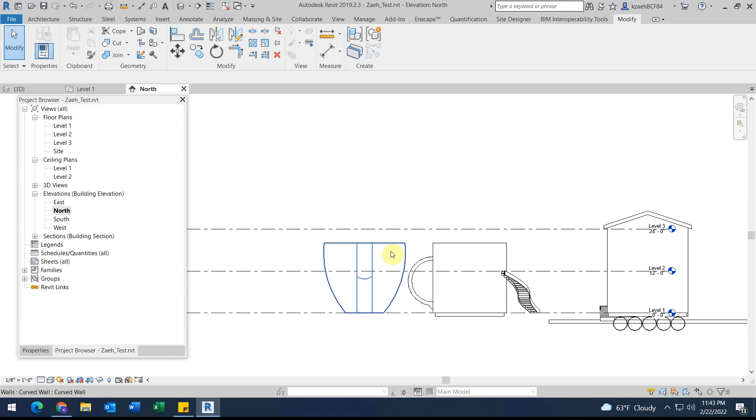A series of domes on a roof that looks kind of like an ice cream cone. So the less things are just straight up and down in Revit, the more complicated things get. But I think also it's just kind of a complicated geometry to think about in the first place because

spheres don't meet easily. So if I took a look at some other buildings, how do these domes meet flat walls, right? It could be something like this that you might see in Greek architecture where, let's see if we can get a little bit closer here. Oh no, it's not going to make the picture bigger. But you can kind of see that there's an octagon, right? So there's an octagon and there's a dome over it, and there's flat roof at the edges of the dome.

Another way it might work, in this case this is St. Mark's Cathedral in Venice. So here there's a series again of flat roofs, and then the circle of the dome roof meets that flat roof, and there can be a series of them. It might also be that there's just always a tower coming up that is circular that will meet the dome.

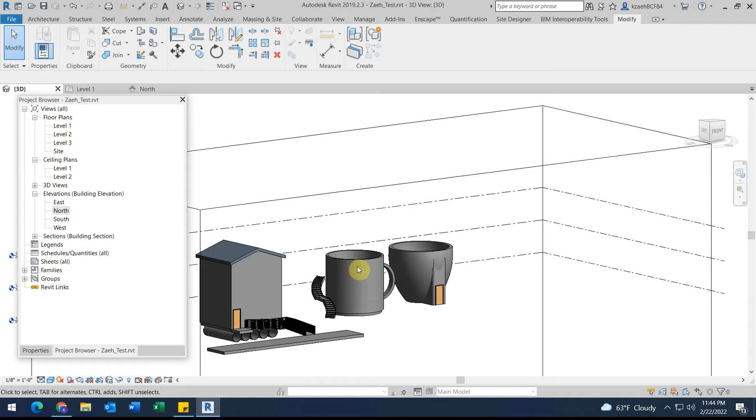So for ours, let's try to at least get an idea of and plan what we want this to look like. So if I go to my level 3 plan, I'm looking at this one. We're saying that we want there to be four kind of scoops on this level and then one more scoop on the top. So I'm going to go to Annotate, Detail Lines, and here I'm just drawing in 2D what I think I want. So let's say I'm going to have 4 of these.

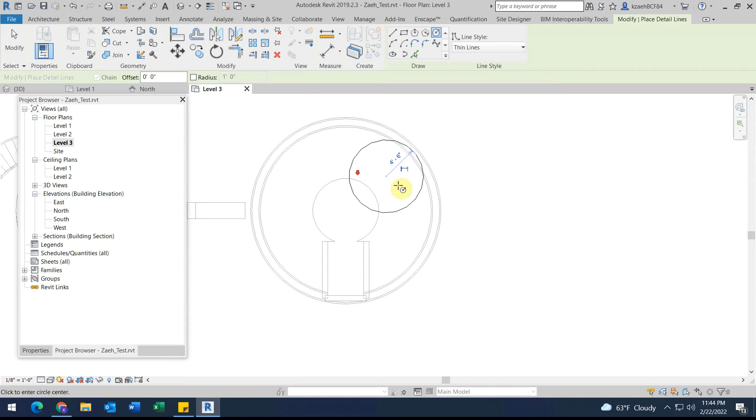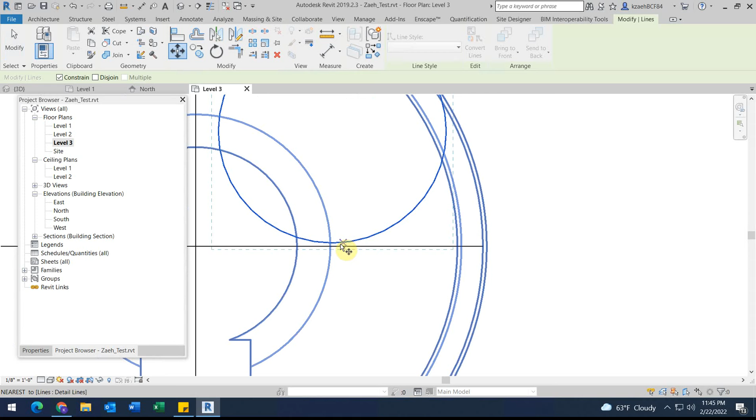So I want a midpoint. I'm going to start out using this just to figure out where is the middle of this. I often draw guidelines to help me out. So let's say that I want 4 of these circles, and I want it to kind of be touching these 2 lines. Okay, so I'm going to have one dome here, and then I think I'm going to mirror it over all the sides. Well, but I still have that center dome I need to make room for.

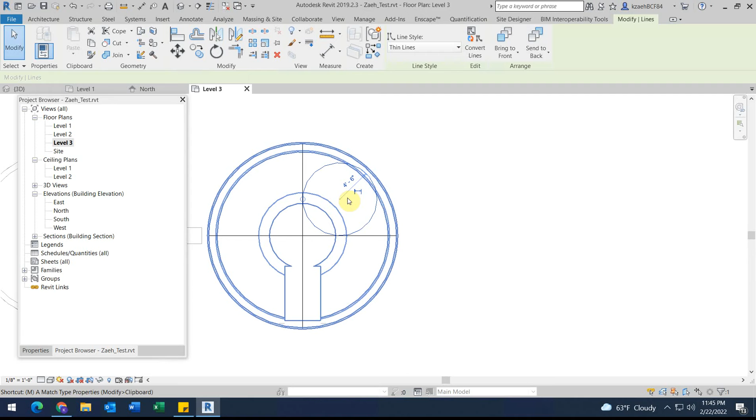So maybe I really need to think about that center dome first. So I want the center dome to be right here. And maybe that one's a little bit larger, and then the ones on the side will need to be smaller. So if I now copy this over, this is going to have to be a little bit smaller here. So I'm going to bring this down to, oh, too small. And I can also drag this edge out.

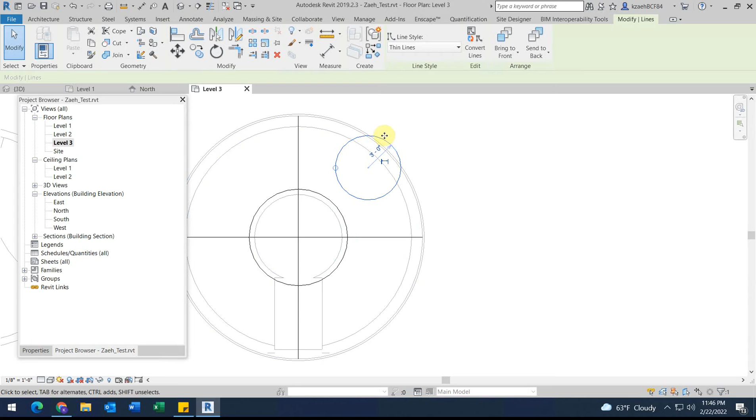So I'm not sure this is exactly what, it might depend on what your floor plan looks like, what exactly these domes will look like, but I'm going to use this as the footprint of the dome that'll be copying around. So I'm just going to mirror it over. So under Modify Lines, Mirror, I'm mirroring that line.

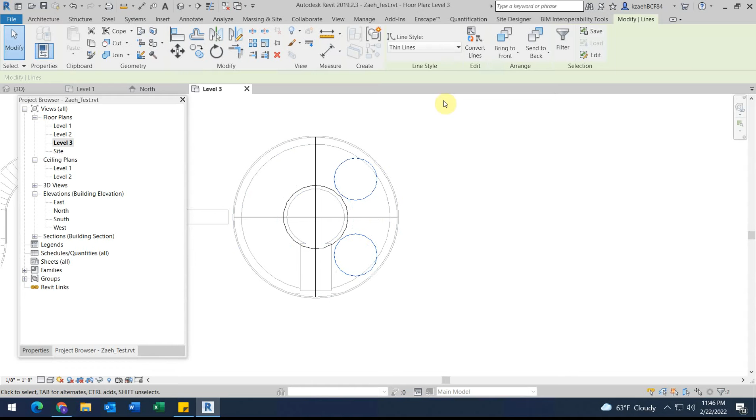Then I can select both of these by holding down Shift. Or sorry, maybe it's Control. By holding down Control, I can select both of them, and then I can use this tool to mirror it over the middle as well. Okay, so I'm going to have a center dome, and then I'm going to have these side domes. So that's helpful to start with.

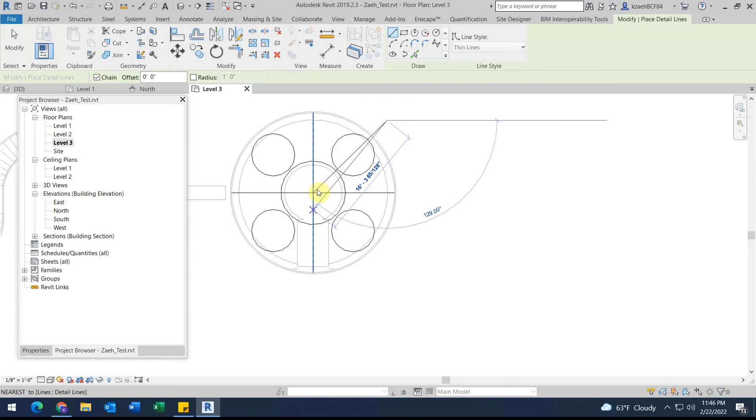I'm going to create a couple more lines for myself. So I'm going to make some diagonals here coming out at 45 degrees. And that's going to help me get those other domes where they need to be. Right now I'm not being very precise with where those are. So if I can find the quadrant of this, the center of that, I could make that a little bit more precise.

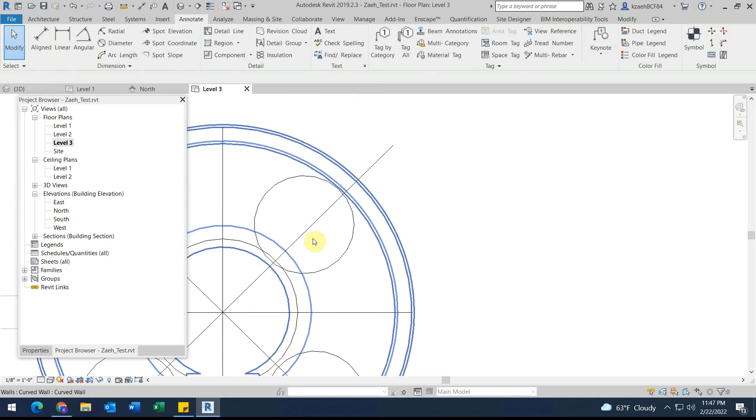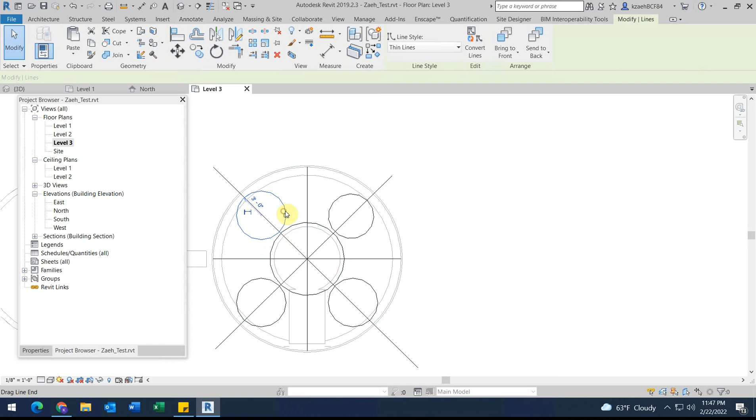So I'm going to rotate this 45 degrees. And then I'm going to kind of get that. I'm going to bring this point, try to get that point on that line so I know it looks about right. Okay, and this wants to be a little bit bigger. I know it seems like a lot of fussing, but it's good to have an idea of where you're going before you start. Okay.

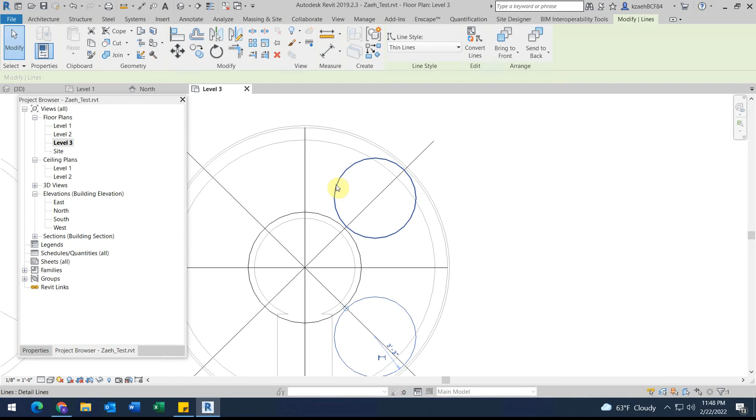Go ahead and mirror these again. Mirror those again. Okay, so here are my 5 domes, one big one in the middle. So the basic idea for making a dome is that we need to have a plane where I can draw the section of that dome in order to revolve it around. So we're going to do the middle one first because that's the easiest one.

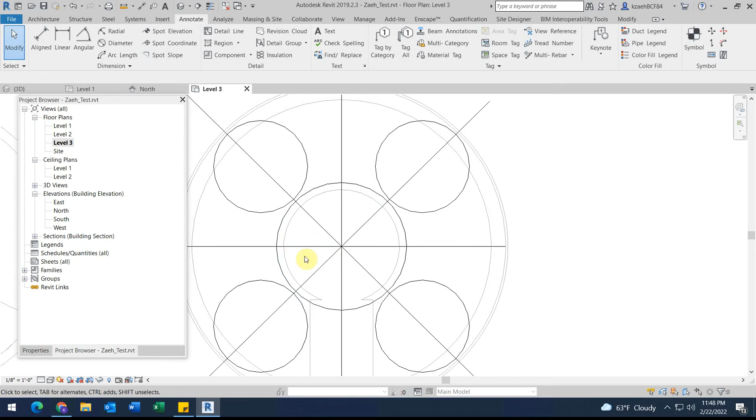Why it's easy is that we already have a view going this way. So if you zoom out, you should see this little triangle here. That is my elevation. So I can bring that in a little bit.

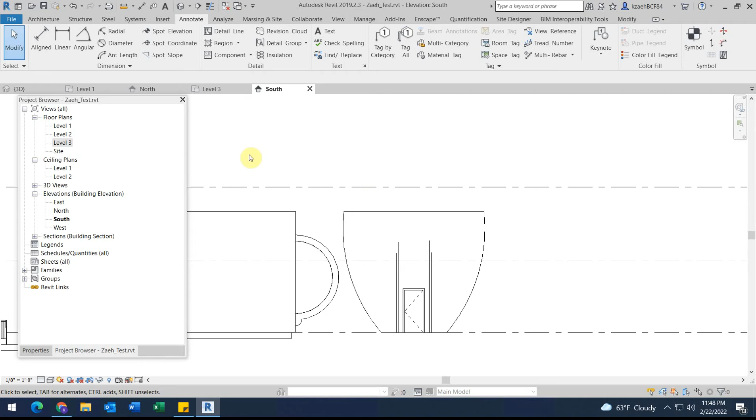But if I double click on here, it's going to bring me to an elevation of my view, which is fabulous. So right now I'm going to want this south elevation, my level 3 plan, and my 3D open all at once. To do that, I'm going to type in WT for window tile, and that'll allow me to kind of see a few things at once.

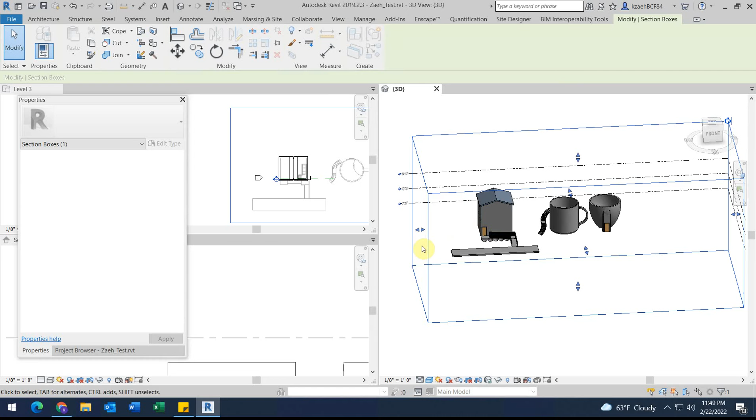I want to omit some of this other stuff from my view, so I'm going to take my section box. If your section box doesn't show up in 3D, go over to Properties for your 3D view, and over here under Extents, click on Section Box, and you should get these little lines here, and then you can drag in the sides so you don't have to look at everything at once, which I find helpful sometimes. Okay. So that's a little bit easier to look at. Great. Okay.

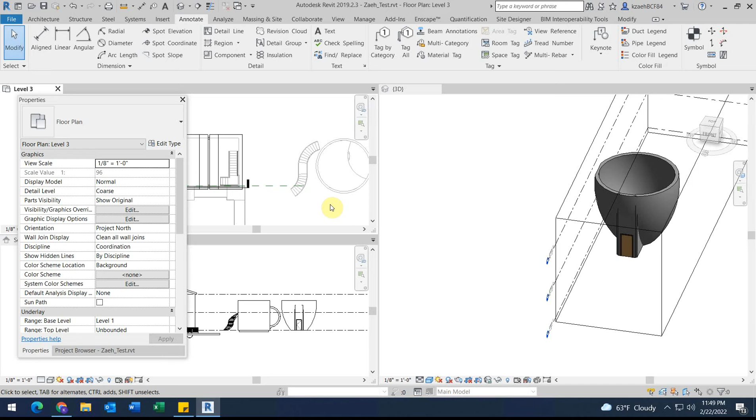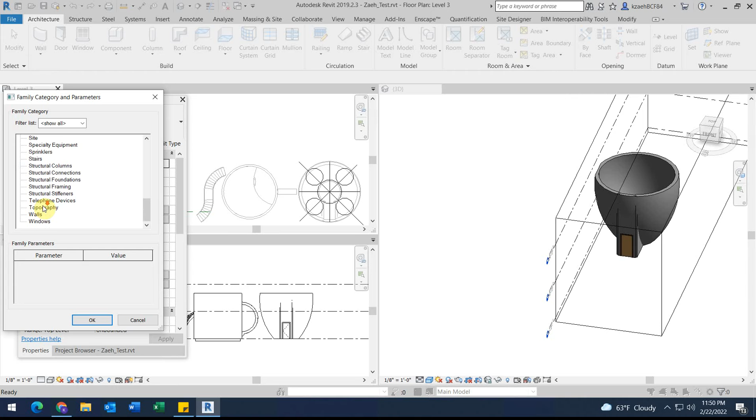So I'm going to go ahead and make my dome. So I need to figure out what the radius is that I'm working with, and also what the height is that I want for these. So to start out with, I'm actually going to make extrusions just so I can kind of see where these things are in my elevation as well. So I'm going to go to Architecture, Component, Model in Place. Here I'm going to pick Roofs and hit OK.

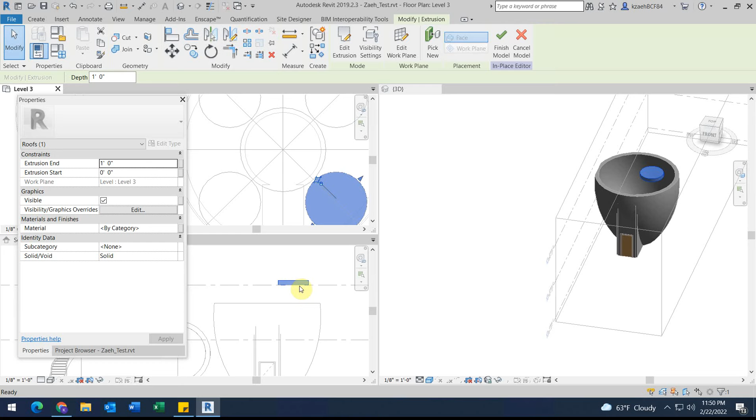So now I'm going to come over here to Extrusion, and this again, I'm just making an extrusion to begin with so that I can see where this is located. So I'm going to hit my check mark. Okay, and here I can drag these down. So let's say I want my dome to be about that high. Okay, I need to have a profile. Oh, sorry, I was going to do the center one first. My bad. All right, so let's do that one more time.

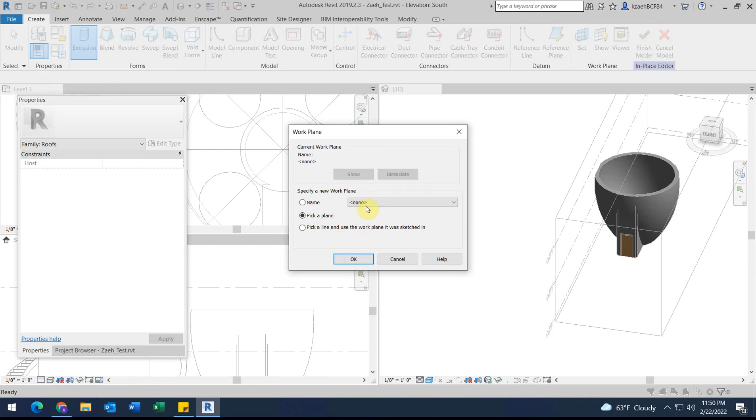So go to Create, Extrusion. Make sure you're in your level 3 view when you do this. Extrusion, use the green picker line to pick the outside of that. Hit the green check, then you can come into your south view and you can drag this down. Okay, so let's say this top one is going to be maybe here.

Okay, so I'm going to go now to Create, and I'm going to do a Revolve. It's going to ask me to specify a work plane. And here I needed to make a plane. So I'm going to hit Cancel. I'm going to come back into my top view. I'm going to make a reference plane, and I'm going to use that center line of my building. I'm going to name my plane Centerline 1. Okay, and then I'm going to go back to Create, Revolve.

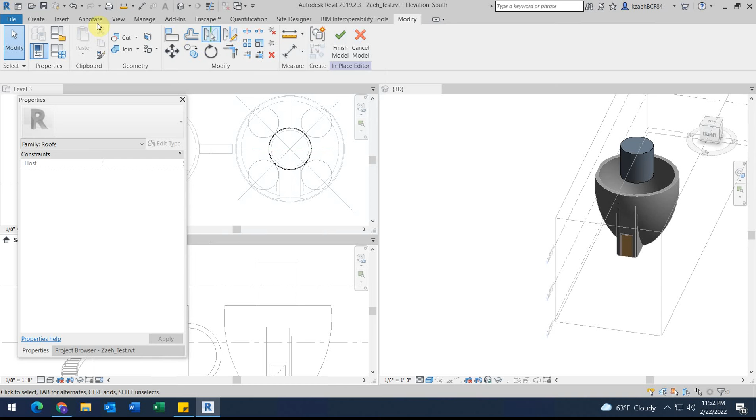Apologies, make sure you're in this view when you do that rather than your top view, because otherwise it'll assume you want this to be the view you're drawing on. So I'm going to come back over to here, then I'm going to go to Create, Revolve. I'm going to pick a plane, so under Name, I'm going to go to my Centerline 1 and hit OK. And now I'm drawing what one section of this roof is going to look like.

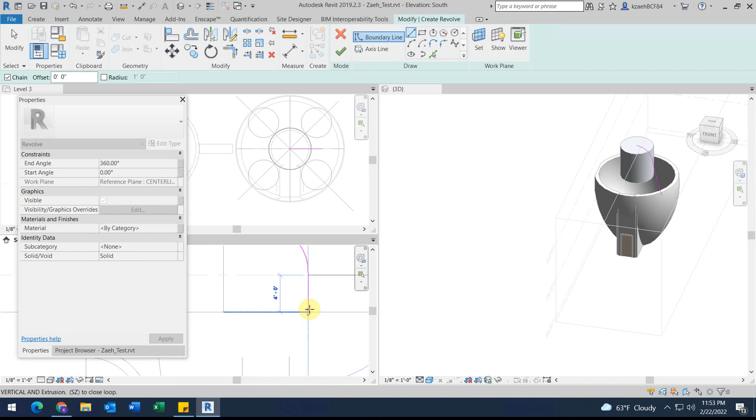So I know that I want it to have a curve, so I'm going to come over here to my curve. It's going to come from here, maybe that much of it. Maybe down to here is kind of the domed portion of it. And then I think I want it to be straight when it hits to here. And I could also do that as a separate wall.

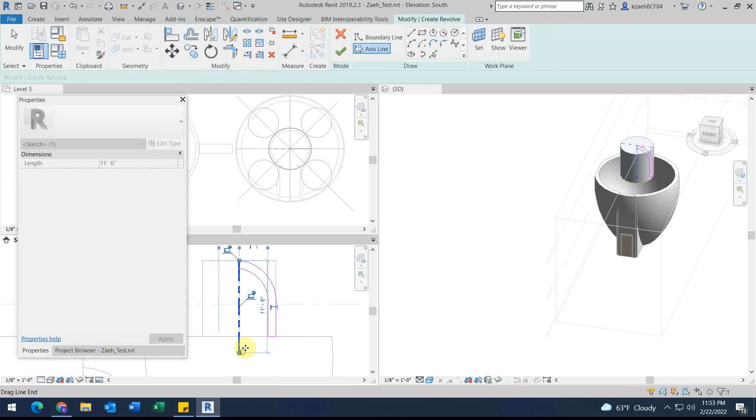And then I'm going to offset this 1 foot to represent the thickness of the roof. And then here I'm going to come straight down, straight across. I need this to be a closed line. Once I feel pretty good about this, I'm going to go to my axis line. My axis line is what it's revolving around. So I'm going to put that in straight through the center, and then I'm going to hit the check mark. So I need to delete the original reference extrusion I made, and there is my initial dome.

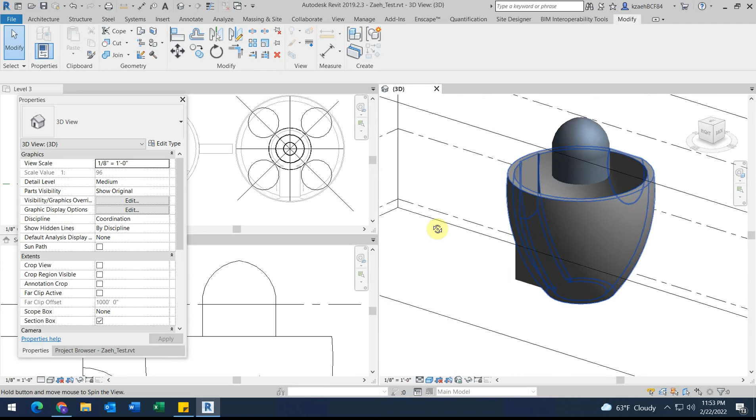Okay, so I'm going to finish my model here. I'm going to do these all as separate pieces. Okay, so here I have my first roof dome. I'm going to do this one next, and then I'm going to mirror it around. So very similar process for this. And hopefully it'll go a little bit faster because we've already done it once. So I'm going to go to Architecture, Component, Model in Place, go down to Roof, hit OK.

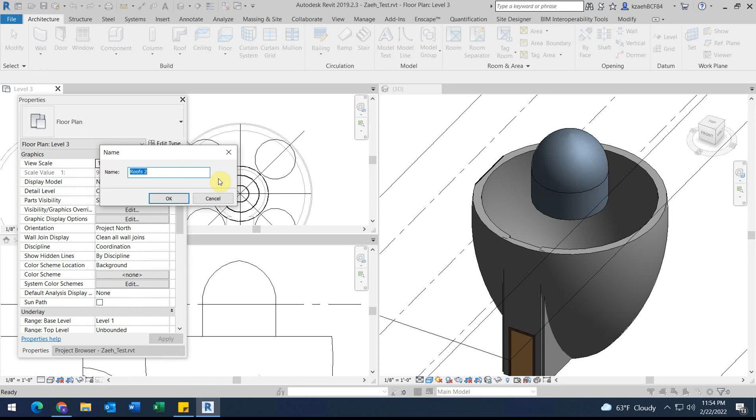And here the first thing I want to do is make my reference plane. So I'm going to click Reference Plane. I'm going to use this line I already made, click from there to there, give it a name, and I'm going to call this 45 ref. Click outside, then go to Create, Revolve.

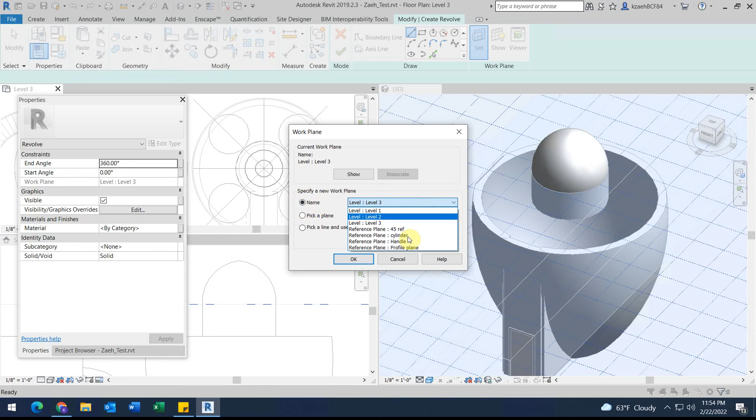And here's where I made a mistake again, right? I didn't have this selected, but I can set my plane later. So I'm going to set Work Plane, and I'm going to go to 45 ref and hit OK. It's going to tell me it needs to open a new view. So I'm going to go to Elevation South, and that'll be over here. So now I'm creating that second view.

What's a little bit tricky is I don't have a section looking right at this so that I can draw that accurately. And I didn't create my extrusion to begin with to kind of guide me, so I'm going to be guessing a little bit here. So I'm going to use my curve tool, come from here, that's where I think the center is, and about how I think I want this. I want it to level out a little bit when it reaches the roof so that I know it'll hit like a straight point.

So maybe from here to here it gets straight, and then I'm going to use my trim tool to trim from here to here. Okay, I need to offset this, and I'm going to keep my roof thickness the same, 1 foot. Then I use my line tool to finish off these areas. Okay, so here's kind of my second dome. I still need to do my axis line, which is going to be right in the middle here. I'm going to hit the check mark.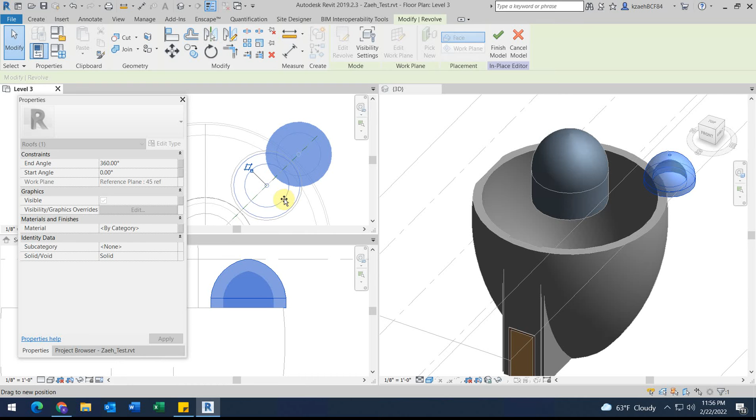Okay, so it's closed. It's just a little bit in the wrong spot. So I should be able to move it over to where I want it here, as long as I'm staying on that line. It looks like it's a little bit smaller than I initially drew. I'm actually happy with that. I could always make it a little bigger though. So if I come back over here, I can go to Edit Revolve, and then I can take this and scale it up a little bit. So let's say I wanted this to come out a little bit.

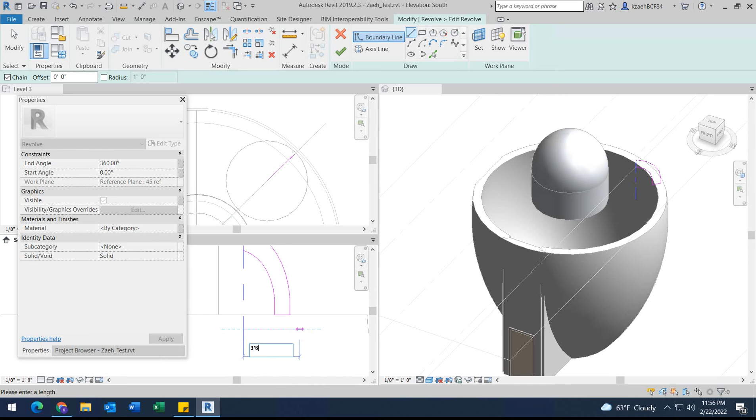For example, maybe I want the base to come out. Right now it's like 3 foot from there to there. Let's say I want it to be 3'6". So I could type in 3'6", just to give myself a guidepost. I'm going to delete these lines. Then I'm going to use this tool again, come from here over to my midpoint. Use my curve again. Trim this to here. I don't need it to go below that roof line, so I'm going to make this shorter. Then I'm going to offset it 1 foot.

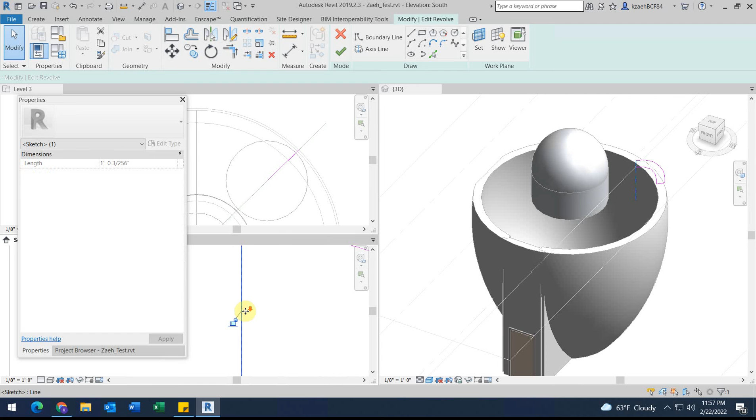And I'm going to close that up. Make sure that this line is actually on your axis line, otherwise it'll have a hole in it. And hit my check mark. Okay, so that came out, the size is a little bit better there. So I'm going to finish my model.

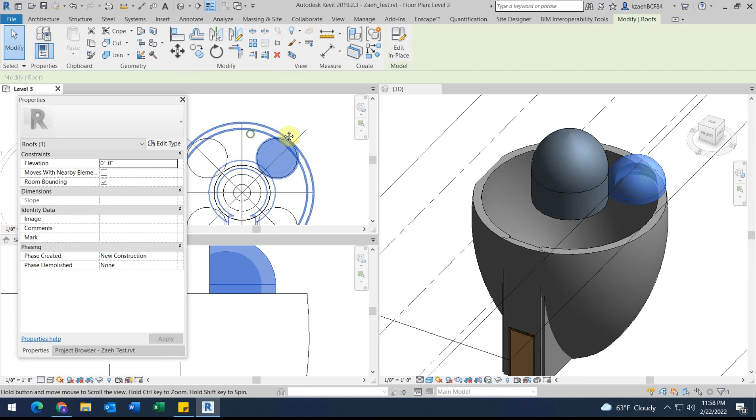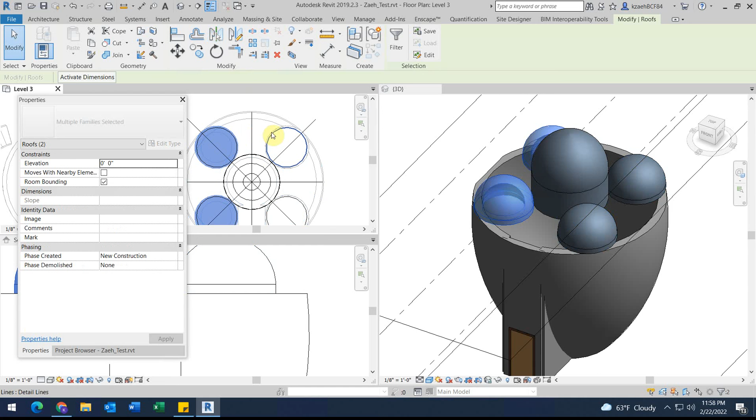Okay, rather than recopying this 100 times, I'm just going to mirror it. So I'm going to select this, go to mirror, and then mirror it over the center line. And then I can select both of these by holding down Control. Make sure you're actually selecting the 3D part. See if it turns blue in here, then I know I selected it. All right, so I'm going to select those two and mirror it over the center line. So now I have my 4 domes here.

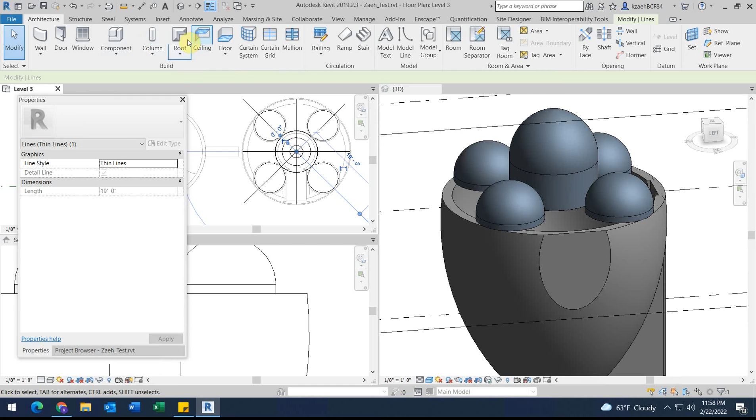Okay, so the one challenge of this though, among other things, is that right now I would still get water in my building because there's all these empty spots. I'm going to just have a flat roof to fill that in. So I'm going to go to Architecture, Roof. I'm going to pick lines. I'm going to pick the outer line of my building. And then here, I don't want anything to define the slope. So I'm going to select here, uncheck define slope, select here, uncheck define slope.

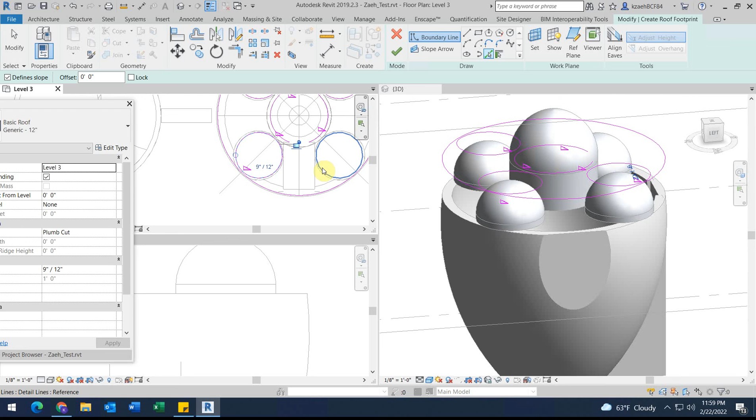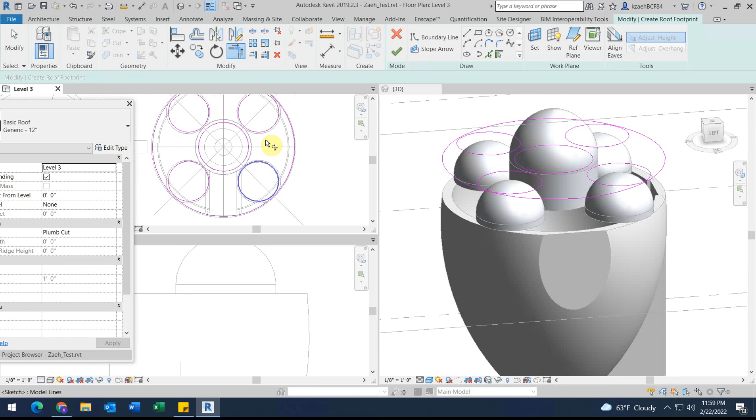The other thing I want to look at is I only want it to fill in where I don't have other roofs happening. So I'm going to use some of these lines I put in here already to help make some holes in this roof so that I'm not creating places that I won't be able to see up through. Otherwise, what was the point of the dome, right? Okay, so I should have holes in there. I need to make sure that everything is closed. There's no random open parts or overlapping parts. If that all seems happy, I'm going to hit the check mark.

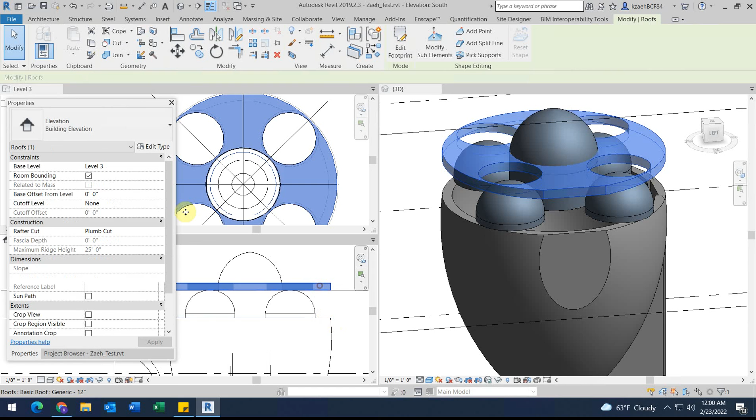Okay, so it's too high. So I need to offset the distance. So let's see how high it is. If I go into this view here, let's see, I need to drop it down 5 feet. So I'm going to select it over here, base offset from level, put in -5 feet. And now that is in a better location for me. And at the same time, if I were to go inside this building and look up, I can see into those domes, so I didn't block off those domes with my roof.